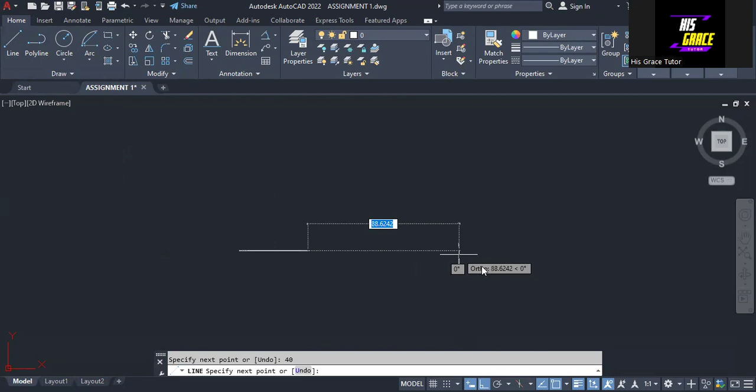The next thing we are going to do is bisect this line, but before that, I want to label each point on the ends of the line. So we give it a height of 2 and the rotation angle is 0. This point is point A, and this point is the other endpoint of the line.

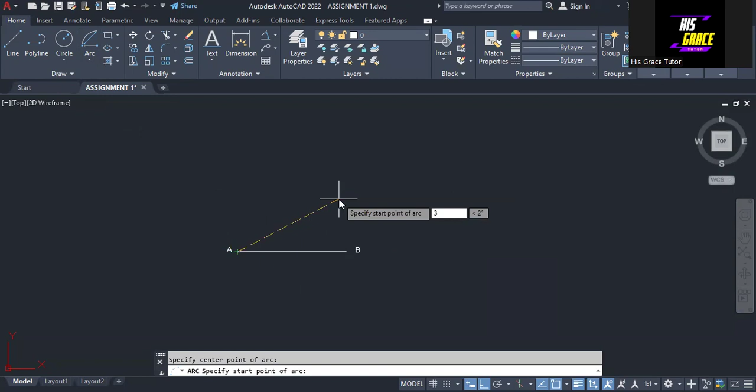The next thing we are going to do, as I said, is to bisect this line. So we take the arc, from this point, and draw an arc giving it a distance of 30.

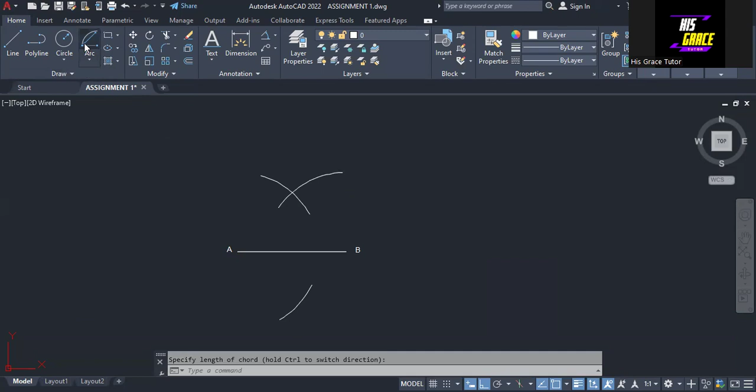So we have this arc. Then we take the arc again, also from point A, with a distance of 30. The arc usually goes counterclockwise, just take note of the way I'm doing it. We make use of center B here and draw an arc, radius 30, so it goes like this. Then we repeat it again from B, with a distance of 30, and we have this.

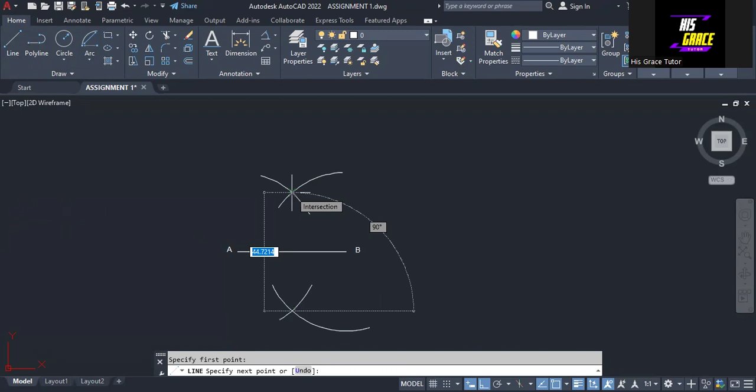Now we can draw a vertical line, from this point, passing through this point, and it goes up like this. So there it is.

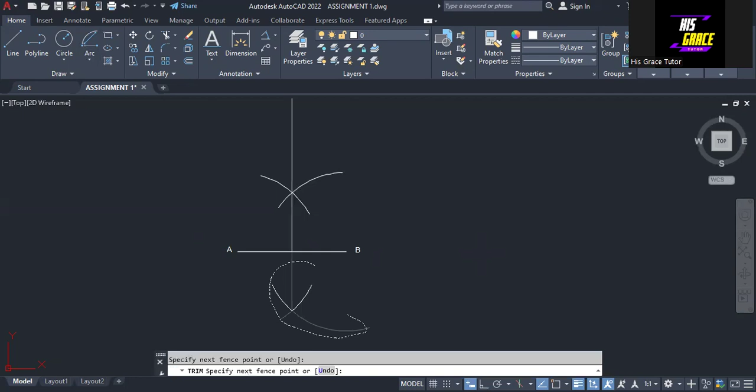I don't really need this one, so I'm going to trim it, trim everything here like this. This is the one I need, I don't need the one up there, but I'm going to do something now.

We are going to draw two circles, making use of this center and this center. So from here, we extend it to point B, and then repeat the circle, making use of this point and extending it to this point. So we have the circles like this.

I will extend this line to touch this point here. So that's what I need.

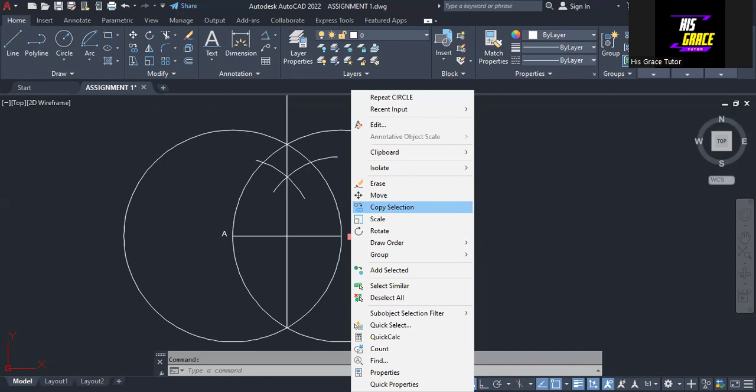The next thing I'm going to do is label each of these points. I'll put up the ortho mode, then I'm going to copy this. So we have this point here, that will be point C, and this point here will be point D. I need to adjust this.

I'm going to edit this. This is point C, and this point here is point D. All right, so we have this now.

The next thing I'm going to do, I need to draw an arc, from this point, passing through this point and touching this circle here. So we take this particular arc, this point at the center, then this point, and it goes like this, drop it.

We want to draw the same arc to this side. What I'm going to do is mirror this arc.

So I will click on mirror, then select the object to mirror, then right click. I will now click on this vertical line. This is a mirror line, so it goes like this. Okay, just ensure that you have it, make sure the cursor is vertical on the vertical line, so drop it. All right, so just click on no.

So this is what we have, what we need. So we have done it. All right, so the next thing that we are going to do here

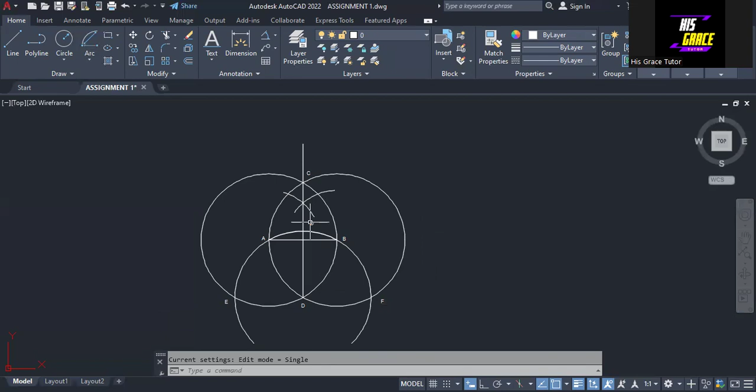is that I'm going to label this point. So I'm going to copy this, so then I have this point here, I have a point here. Then where the arc touches the vertical line, there's a point there. So I'm going to change this, so I'm going to edit this and it will be point E. So this point here is point F, and this point here is point G.

So we have this. So the next thing that we are going to do is draw a line passing through, starting from point E, passing through point G and touching this circle. This is what I mean. So I will draw a line from this point, passing through point G. Okay, I will take it up like this, let me just extend it directly. Okay, so we extend like this, and it touches the circle at this point. All right, so we have this now.

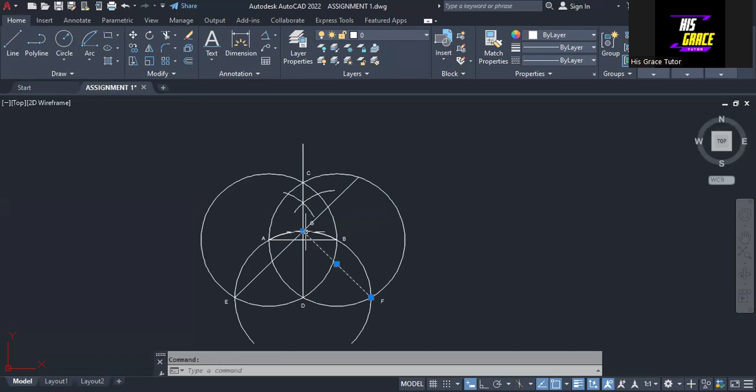So next, we are going to repeat the same line. So from point F, passing through point G, I'll just drop it here. Then I will extend it, I will stretch it, so it goes like this, and touching this circle at this point. All right, so we have this now.

So the next thing that we are going to do is extend this vertical line a bit. I need to extend it, so it goes up like this. All right, so that is okay.

So then we are going to take the arc, okay? So this particular arc, standing at this point, so the length of the polygon is 40. So I'm going to give it a distance of 40. So press enter key and draw the arc here.

So then we take it again, okay, we make use of this point and then we give it a distance of 40. So it goes like this, intersecting this one. Okay, so we are going to label this point, and this point.

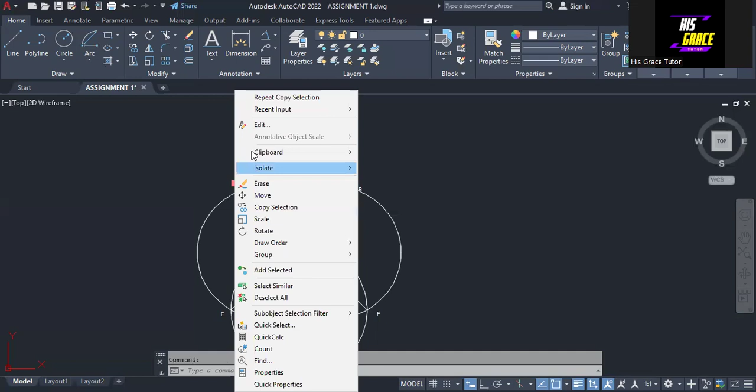So I'm going to copy this one, okay, I'll copy the selection. So I will drop one here, and then drop one at this point. All right, so I will edit each of them. So the next one that we have, EFGH, so this is point H. This point here is point I, and this point is point J. Okay, so we have this.

So I want to take this letter, I want to take it, so bring it somewhere down here. All right, so it's okay.

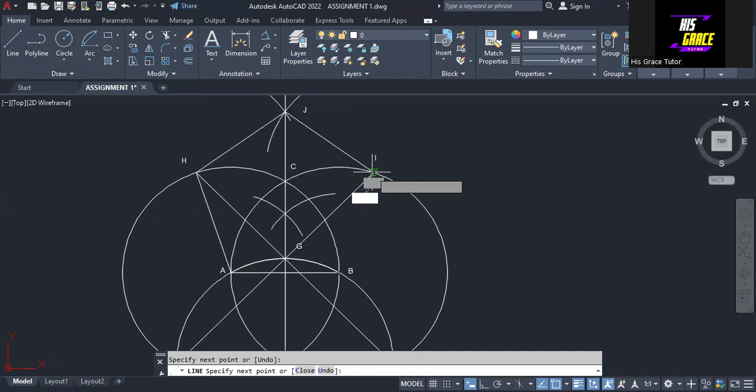All right, so the next thing that we are going to do is just to join these 3 points together, including this one. So we join from here, from A to H, and then to J here, okay, to I, and then back to B. All right, so we have the polygon.

So let's thicken the lines, let's stick in the length of side of the pentagon. All right, so we come here and then we select this, okay, so this is the pentagon.